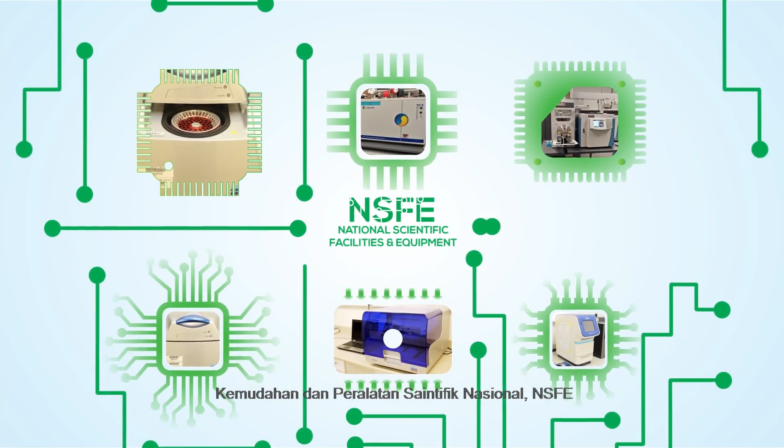National Scientific Facilities and Equipment, NSFE, aims to encourage the sharing of facilities and equipment and cultivate research collaboration among the STI community. You can also book NSFE via portal or mobile apps.

R&D Project Bank shows lists of information on research, development and commercialization projects throughout the Malaysia Plan, as well as its outputs and achievements. Technology Market, or TechMart, promotes local products or technologies and boosts technology transfer among researchers and industry.

STI Indicator is used to measure the performance of STI in Malaysia based on goals established by the government.

KRSTE.my empowers you to formulate STI policies based on STI data, streamline and optimize R&D resources, practice data-driven decision-making, and harness scientific knowledge for new invention and innovation.

Our new features will allow elastic search, automatic email notification, mass upload, live updates, dynamic report, and online booking.

Be a part of KRSTE.my to explore the explosion of scientific knowledge and information. CRIS, connecting you to the world of innovation.

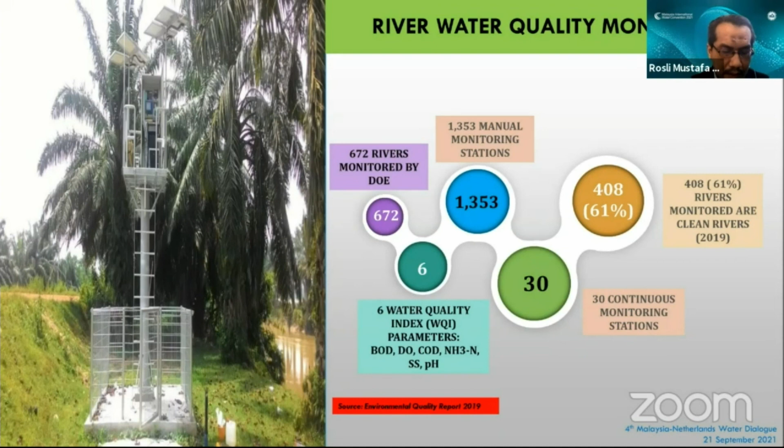For river water quality monitoring, we have 1,353 manual stations, as mentioned by our Datuk Sri Zaini Ujang, and 30 continuous stations across 672 rivers throughout Malaysia. Among the parameters monitored under the monitoring program are pH value, dissolved oxygen, suspended solids, biological oxygen demand, chemical oxygen demand, and ammoniacal nitrogen.

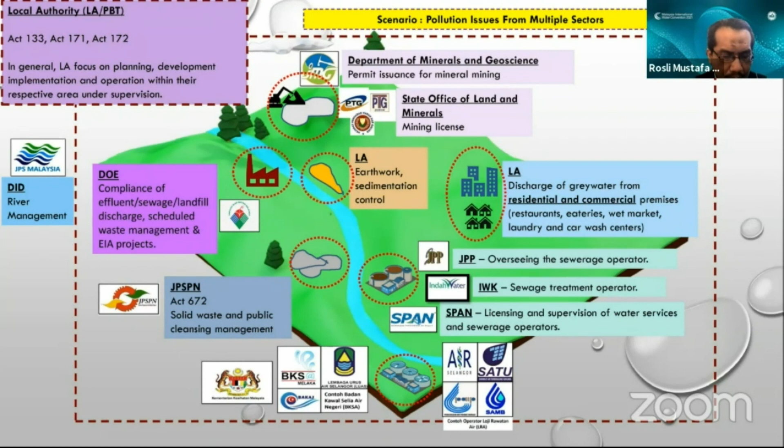Apart from the DOE, authorities such as Suruhanjaya Perkhidmatan Air Negara (National Water Services Commission), the Department of Environment, and the Department of Irrigation and Drainage, along with IWK, Indah Water Konsortium, as well as state water regulatory authorities and local authorities, also have an important role in managing this subject.

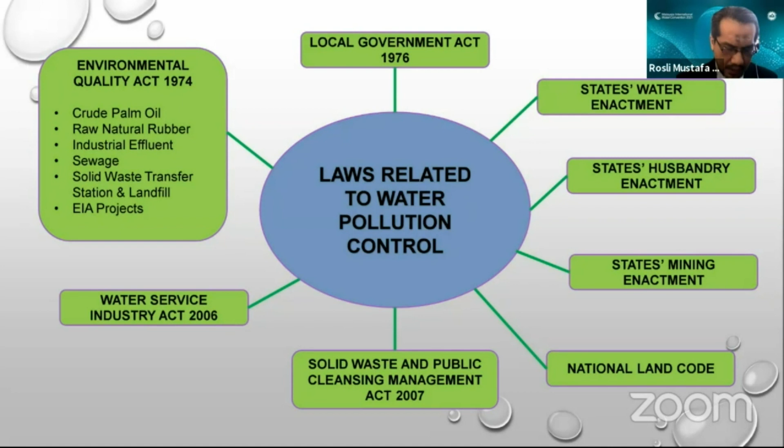Hence, a concerted, holistic and integrated approach involving related ministries, departments and authorities is of significant importance. The Department of Environment has incorporated the integrated approach element in managing water pollution for quite some time.

DOE also actively supports the plan developed by supplying river water quality data. And as mentioned by our Datuk Sri, public participation is very important, so we also carried out communication, education, and public awareness programs.

I have reached the end of my presentation. As a conclusion, an integrated approach among the authorities at federal, state, as well as local level is obviously a critical solution in ensuring water quality is well protected. In addition, public participation is also a vital component of this cooperation in safeguarding our water quality.

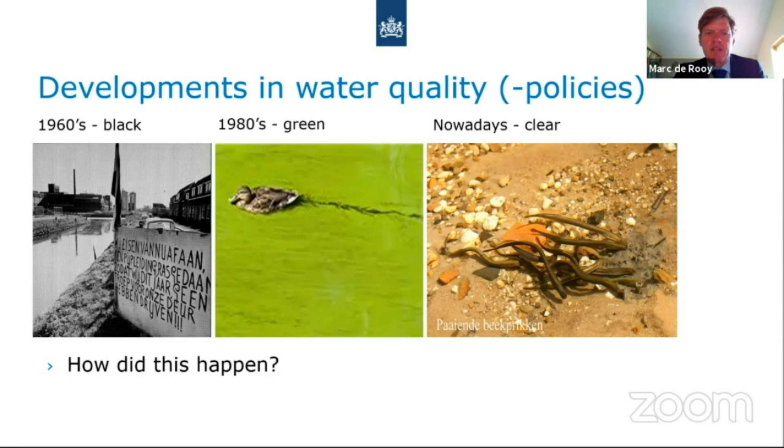So what happened in the Netherlands? We had a development in water quality since the 60s. In the 60s, our surface waters tended to be black because of the lack of oxygen. Over 20 years' time, we turned them from black to green because there were too many nutrients in them. Nowadays, not everywhere but in several places, we have clear water again, and we see species returning after decades of absence. So the question is, how did this happen?

Of course, something was done in the treatment technologies. In 1970, the Water Pollutions Act came into force, introducing a system of permits, taxation, and subsidies. In order to discharge, you needed a permit, and this discharge was taxed, and the money collected was used to subsidize new technologies and processes. This introduced a long-term process of continuous improvement. It took about 20 years, and in the starting years we really looked into the removal of oxygen demand.

In the 90s, there was the EU directive from the European Commission on the treatment of urban wastewater, which meant we also had to remove the nutrients. This made the change from green water to clear water.

Now, in the current days, you can see a lot being done in process optimization. We work on the removal of micropollutants, which is the latest development, and we are recovering energy and raw materials.

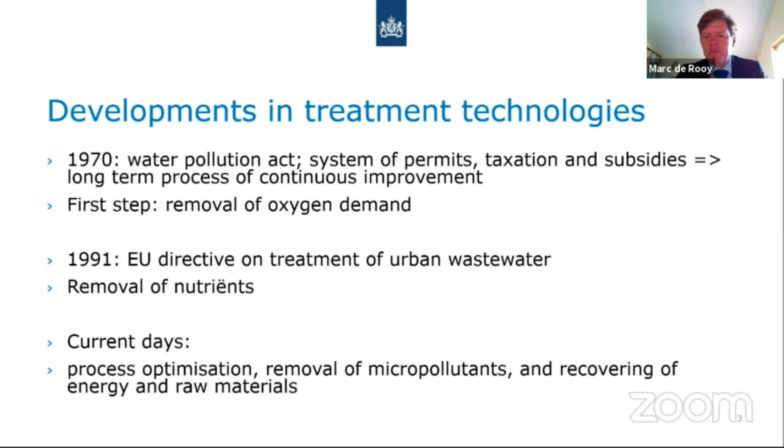However, in 2012, the Nereda process was invented, which you could say is an optimization of the activated sludge process. It's a cycle in 3 phases. First, you feed the tank - you can see it's grains, and the bacteria live in these grains. In the first phase, it's being fed, then we have the aeration phase, then there's settlement, and then part of it is discharged, followed by new feeding, and it all goes around.

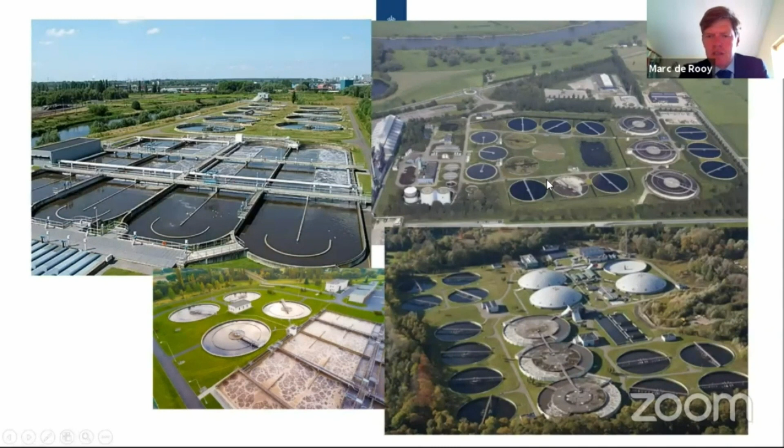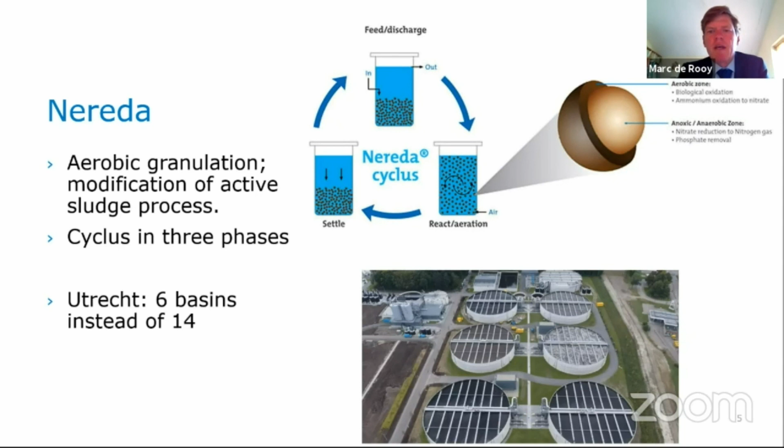Well, it really made the installations a lot smaller. So for example, in Utrecht we used to have an installation with 14 of these settling tanks, and nowadays it's all comprised into 6 tanks. So it makes the installation much smaller and also more energy friendly.

Another improvement that started last year was the removal of micropollutants. It started in 2016 with the Dutch chain approach on pharmaceutical residues. And of course there's being done a lot at the front end of the whole chain, but we think that most will be done at the sewage treatment end of the chain. We think 80% of the effects will be achieved there.

So we have to improve the sewage treatment plants, and at this moment we are looking at the use of ozone to oxidize micropollutants, and active coal to adsorb micropollutants. There is an innovation program started with the water boards, the regional authorities that own the sewage treatment plants, together with consultants and universities, really looking into new techniques and improving the existing ozone and active coal technologies. This year, in 2 weeks, the first full-scale installation...

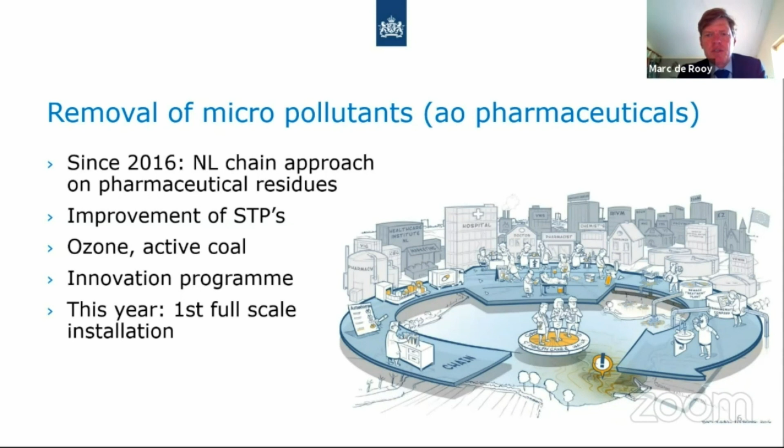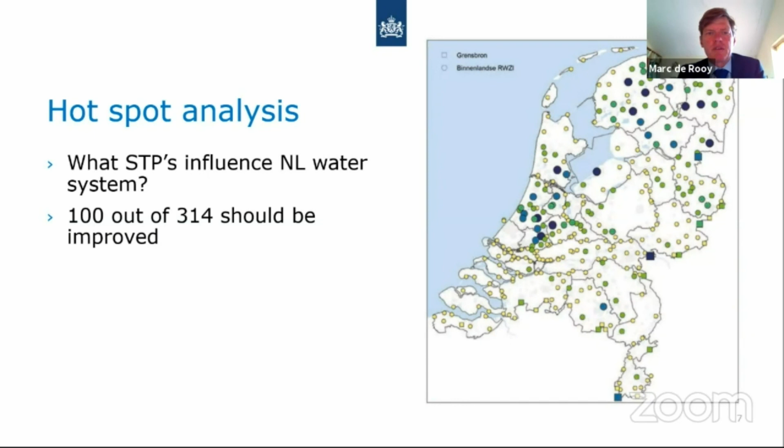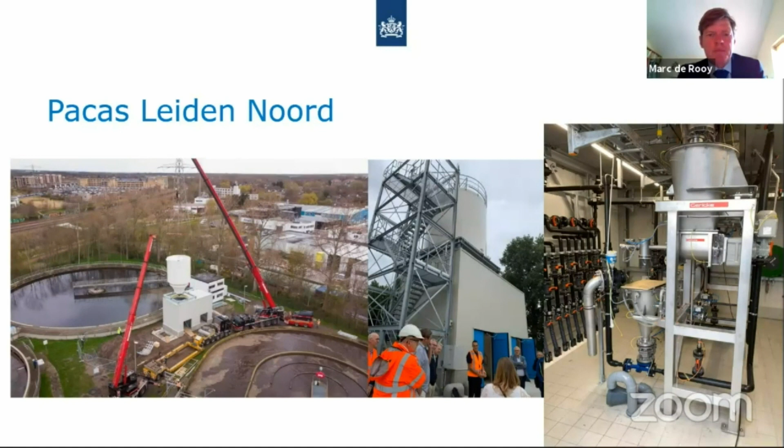...will improve all of our wastewater treatment plants. We made a hotspot analysis, which showed that there are about 80 to 100 STPs that are really influencing the surface water, and they need to be improved first. This is the installation in Leiden North. It's a coal installation that will be opened on the 30th of September. You can see here the active coal tank, where you can see how small the installation is, and here is the actual dosing part. It's really small, and I think it's a really good next step in our treatment of urban wastewater.

Finally, we have some other developments. Of course, recovering energy in the form of gas was longer known, but nowadays we are also looking at recovering raw materials and nutrients, done in the form of struvite, but also cellulose. The latest improvement is that we are actually recovering the water itself. We have problems with droughts also in the Netherlands, and we're looking now at the possibility of reusing that water in agriculture, but also in industrial processes.

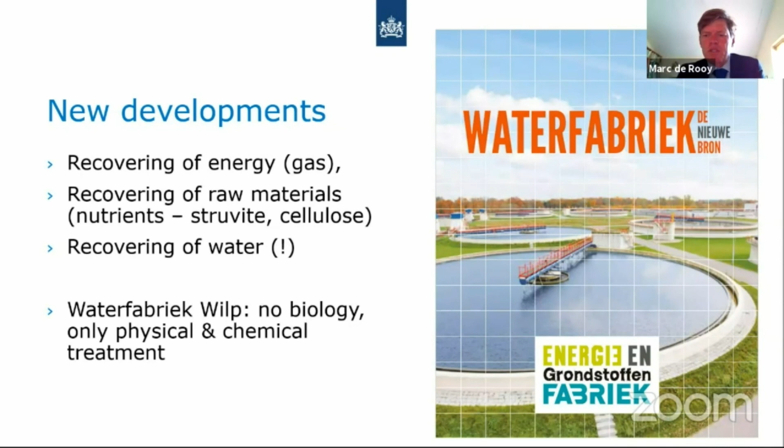And finally, very interesting but still very expensive and rather new, is the Waterfabriek Wilp, a water factory in Wilp. Wilp is a small place in Veluwe, in the Netherlands. That doesn't use biology at all, it's only physical and chemical treatment. You could say that it's refining the wastewater, trying to recover as much energy and raw materials as we can from the water.

So this was my presentation. Feel free to contact me if you have any questions. Thank you.

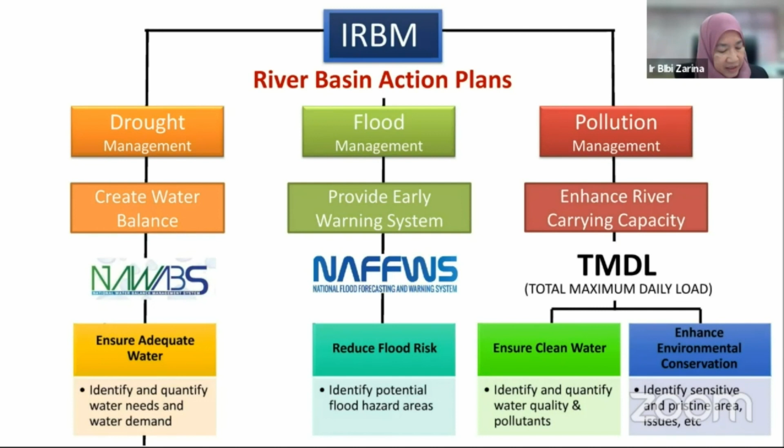So what is important is for us to look at the carrying capacity of the river, which can be done by looking at TMDL, or Total Maximum Daily Load. TMDL is the maximum amount of pollutant that a body of water can receive or accept. This is under the Department of Environment, DOE, where the aim is to ensure clean water, clean river, at least class 2, where we can have body contact.

Besides the integrated approach mentioned, another approach is through cultural transformation in river management. The minister and Secretary General also mentioned this, which we call Denai Sungai Kebangsaan, or the river trails. This program is strongly promoted by the Ministry of Environment and Water, or KASA, where the objectives are to control river pollution, encourage recreational and nature-based activities, improve water quality, and establish shared responsibility to preserve our river and encourage ecotourism.

The strategic partners will be the federal government, state government, local government, NGOs, communities, and also private corporate entities or universities. As mentioned earlier, you can also have Friends of Rivers, the NGOs, and we work together with them under this program.

The program can include an adopt-a-river program, CSR program, awareness and education program, community program, and we can have gotong-royongs. Gotong-royong is our term for when we go together and clean the river.

As a way forward, among the strategies that the DID, the Drainage and Irrigation Department where I come from, is working on is to build with nature. Meaning not to concrete line all the rivers, which is what we used to do, but now we're going back to building with nature and making room for water. We know that water needs space, it needs room.

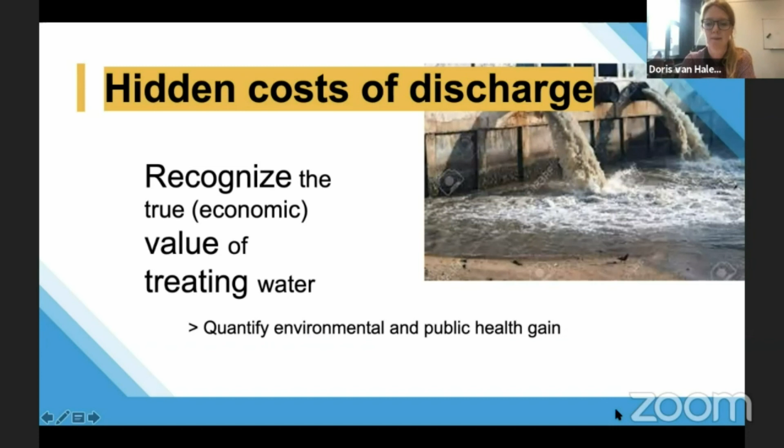So I think it's important that we start recognizing the true economic, not only economic, but true value of treating water prior to discharge. Not just looking at the health of our rivers, but also looking at what is in our waters and how we can add value to this waste stream. Which means we also need to quantify the environmental and public health gain associated with having better quality discharge water. I'll get back to that later.

So first, let me introduce one of our projects in New Delhi, India, which attracted a lot of attention in past years. Here you can see our king and queen visiting the rather polluted site, because this project is about reusing water and reusing nutrients and other valuables that could be available in the water of the Barapula drain, which used to be a storm drain but over the years has turned into an open sewer, because there is no closed sewer collection in this part of New Delhi. Which means it's more of a river that is highly polluted, smelly, and unattractive and unhealthy to live close to.

So within this project, which is a collaboration between IIT Delhi and TU Delft, Wageningen University, and NEO - so different research institutions within the Netherlands - different technologies are being studied to recover resources in the water. On the right, you can see a project on algae. In the middle, there is a wetland project. And to the left, there's a project by my colleague Antonella on the DAF system.

My own background is not in resource recovery from wastewater. I'm a drinking water engineer. So I don't really look at the resources in the water, but I'd rather consider water to be the resource in the water. I'm quoting a colleague from Water Board here in the Netherlands who said to me, water is our most valuable resource. For us, it's really hard to give value to our water because of restrictions and other reasons that make it complicated to offer fully treated wastewater back to the community. So much of the water that is being treated rather well now is discharged into the ocean, instead of reuse for agriculture or construction or even households.

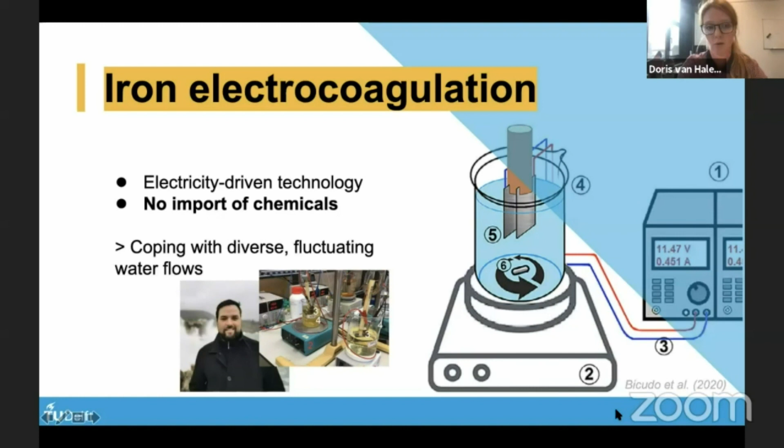So I think this is really exciting. It needs scientific depth, but in practice you have a bulk technology that can do a lot of jobs at the same time in a water treatment train.

A second project I'd like to highlight is a project of my colleague Saker, here in the picture. This project is oriented on Malaysia - it's a palm oil mill effluent to diamond project. I think this project nicely illustrates that instead of looking at the waste, which is the palm oil mill effluent, they are envisioning the production of diamond electrodes, which is really attractive, right? So in this case, prevention - preventing pollution - I think can be turned into something that is actually quite sexy, namely producing diamond electrodes. Technologically advanced, but in the end this palm oil mill effluent treatment will prevent pollution of the rivers.

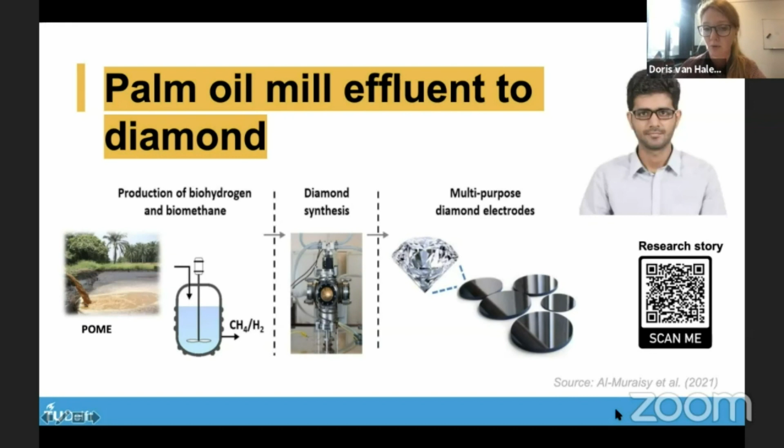My last example is a project we ran last year, close to my own work field, related to groundwater sludge. There's actually a wrong number here because there is every day 10,000 tons of sludge produced in the Netherlands. So here it says worldwide, but it's just in the Netherlands. We rely on groundwater but are a small country, so if you translate it to the globe, it's way more tons of sludge produced by the production of groundwater.

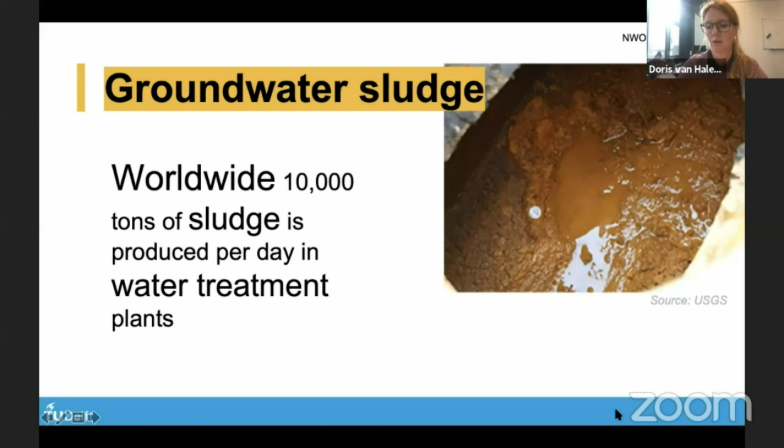The sludge now, at least in the Netherlands, is mostly due to the filtration technologies we use with oxidation filtration, typically used anywhere in the world. But we envision a shift to more anaerobic reverse osmosis, where the concentrate stream might be even higher than the sludge currently produced. So this really is a waste problem.

What we looked at is, instead of producing this waste, this watery and not really useful iron oxide sludge, could we produce vivianite, a beautiful blue magnetic crystal. And it worked, we were so happy. The nice thing is that apart from producing vivianite, as you can see in this graph, we also got higher removal percentages of the iron, which you can see if you compare the second bar to the first one - it's slightly higher.

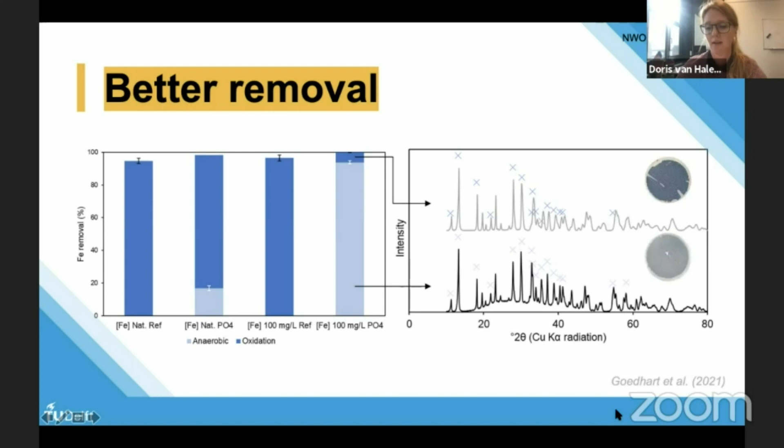At first glance I feel like, what does it matter, it's just a few micrograms per liter extra removal. But actually for water companies this is incredibly important because iron, even at low concentrations, causes brown water at the customer. Here in the Netherlands we drink water from the tap, and having brown water once in a while is really problematic for trust in water quality. So a very exciting new innovation, and we'll be working on it further in the coming years.

So what I wanted to underline in my presentation is that water pollution goes beyond cleaning up our water bodies - we should start rethinking and valuing our wastewater streams, and technologies can help in that.

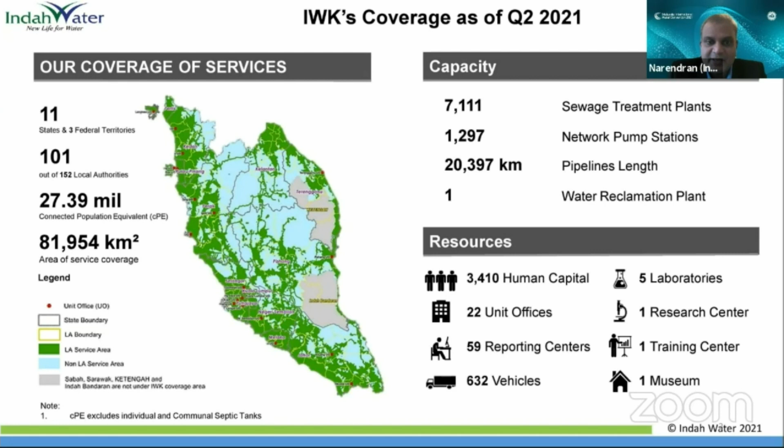Our resources include about 3,400 human capital - staff and employees - supporting through 22 unit offices nationwide. At scattered areas we have reporting centers, 5 laboratories, 1 research center, 1 training center, and 1 museum - an old British-built pump station that we are rehabilitating now, soon to launch as a museum sometime next month.

At a glance, in Malaysia, sewage management, apart from connected sewage services, we have close to 1.3 million individual septic tanks and close to 900,000 pour flush systems. So apart from treating at our public sewage treatment plants, we also provide desludging services to all our customers nationwide.

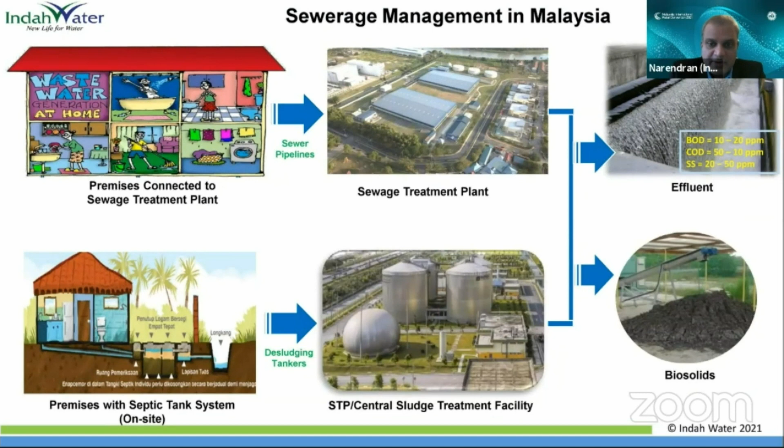Very similar to what Engineer BB presented just now, there are many sources of pollutant into rivers, among which animal farm, manufacturing industries, agro-based industries, wet market, and sewage. Now, the major pollution does come from sewage, of which primarily from septic tanks.

So what we have done this year is we have gotten, or rather the government has approved, for desludging of septic tanks to be done on a scheduled basis, and the regulation has been gazetted.

From the company perspective, we have enhanced throughout the years the initiative to ensure that water catchment areas are protected. Hence, our treatment plants located upstream of water intake points and major plants are equipped with early warning systems. We have 24-hour surveillance team members moving around at critical plants upstream of water intake points, and 24-hour employees or contractors manning large plants, primarily centralized plants and plants within water catchment areas.

Our employees, 2 years ago, designed a manhole locking system where apart from the manhole cover, we have another platform beneath it with padlocks, which is very difficult to open. So we have initiated the installation of such manhole locks at critical areas. This is because we have been facing illegal dumping by irresponsible parties into secluded manholes located at secluded areas.

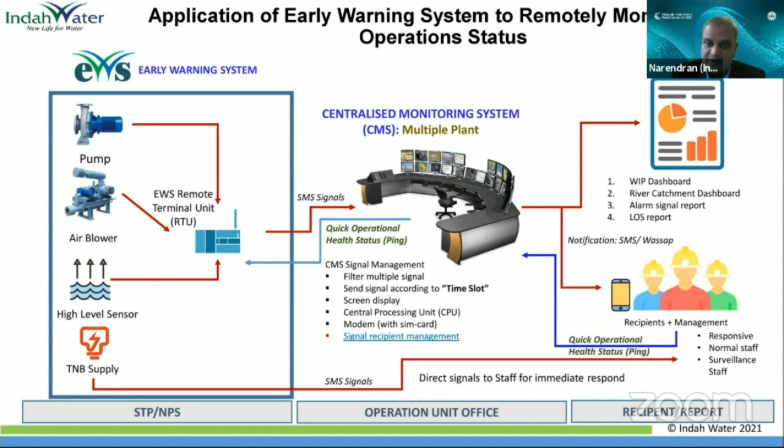So all these signals are sent through SMS, and once the team is aware, necessary action will be taken. We monitor this and have created our own dashboard for internal use. This has been progressing, and we've been continuously enhancing our system.

This is a typical example: mobilization of a 24-hour surveillance team at critical water catchment areas. We have a team with 3 shifts, at times 2 shifts, moving around to ensure that all our plants are properly running and there's no illegal substance entering into our plant.

This is a new initiative that we have carried out; the proof of concept is ongoing now. We have installed a device to detect potential illegal substances such as hydrocarbon, solvent, pigment, as well as COD. So if there's a spike in COD, this sensor can trigger and we can take the necessary action to carry out what is required. This has been quite successful. It's very costly, but we're looking at it for installation at critical areas.

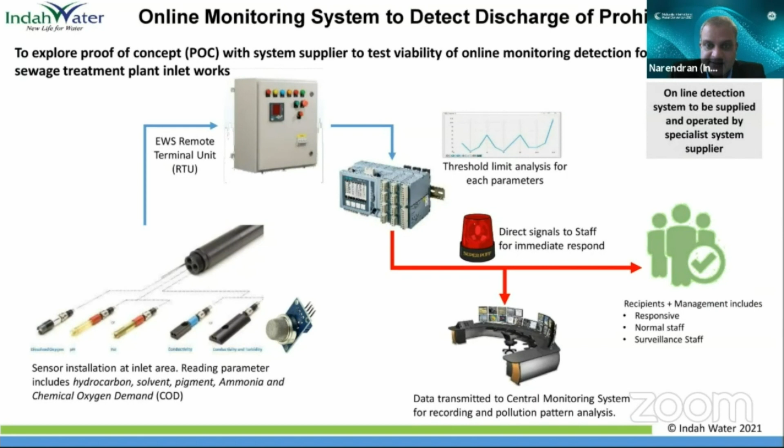Moving towards achieving a circular economy as well as controlling pollution, we have been working with the Ministry, which has been very supportive in creating or converting the planned sewage treatment plants, future sewage treatment plants, to also be complete holistic water recycling plants for non-potable use.

So we have a target, the ministry, within 10 years until 2030, we have to have infrastructure to produce 1,500 million liters per day. This is an initiative to create a new source of water, but I want to emphasize it's purely for non-potable use, mainly for industrial usage. By having such advanced treatment technologies, we are able to control pollution and further recycle this water for good use.

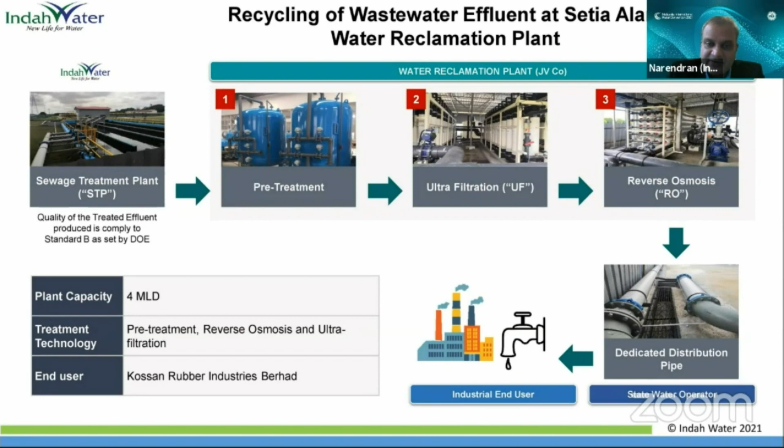Thank you so much, Mr. Narendran. I think a lot has been shared by Indah Water Consortium Sdn Bhd, and a lot has been done as well, and a lot will be done towards protecting our sewage treatment plants, task forces on states with higher risk, and providing online monitoring systems for all the systems in place by Indah Water Consortium. Thank you, Mr. Naren.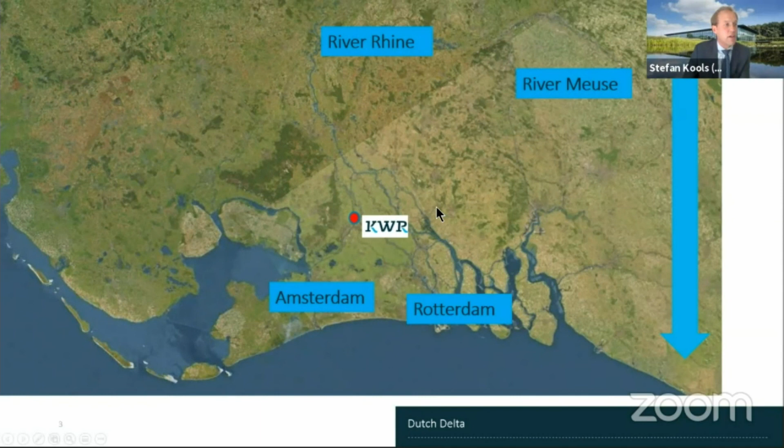I'm talking about surface water today, being the focus of our studies. For example, this is a recent study in which we were able to look at the long-term development of all kinds of compounds that have been part of the national monitoring program, to inform the drinking water companies, the water stakeholders, and also the Dutch government. You can clearly see that some compounds are phased out, they are banned, and then they will diminish in the water. But also some new compounds will emerge and be detected, and sometimes even increase due to high use and high loads in the river.

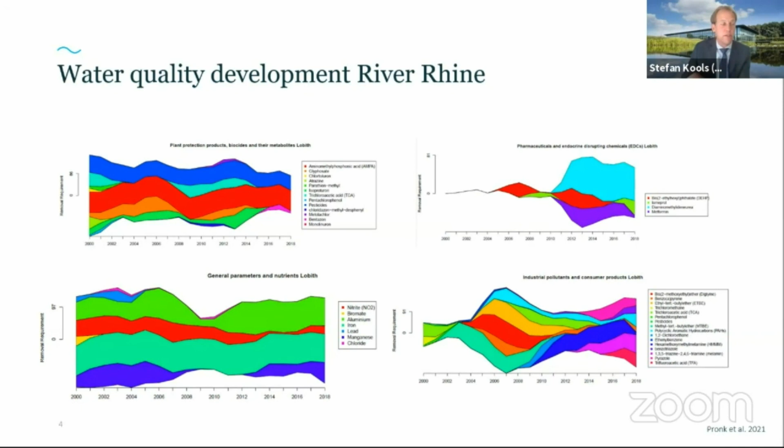For example, we were able to make a water quality index to show that slowly the removal requirements, so the amount of technological equipment needed to produce drinking water from river water, is slowly increasing over the years, which is not what we want to have in Europe and in the Netherlands. We want to have cleaner water.

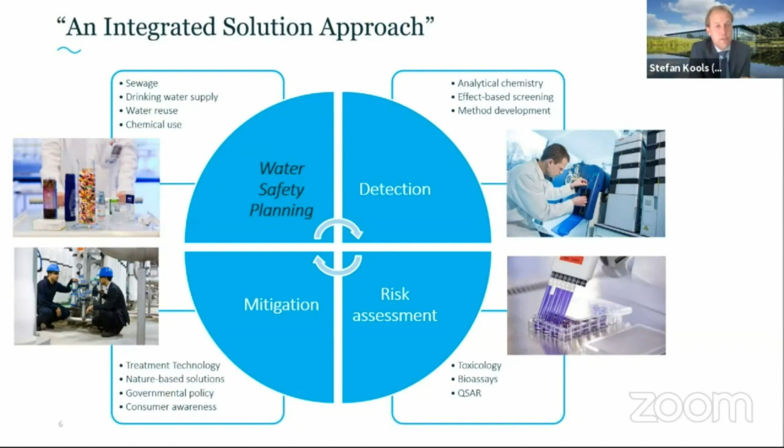So the title of today's session was an integrated solution approach, and I have been focusing on the water safety planning cycle as a whole. Our research is focusing on detection methods, on risk assessment, and mitigation options, the last of which is technology. But let me first start with detection, the core of our research group.

Here we often use the term target analysis, where you already know what you are looking for, and you specifically measure or detect the compounds of interest. But what we have also been successful in the last decades is to more and more study the unknowns, the non-targets, the compounds that you don't have information on. And with that, you use high-resolution mass spectrometry.

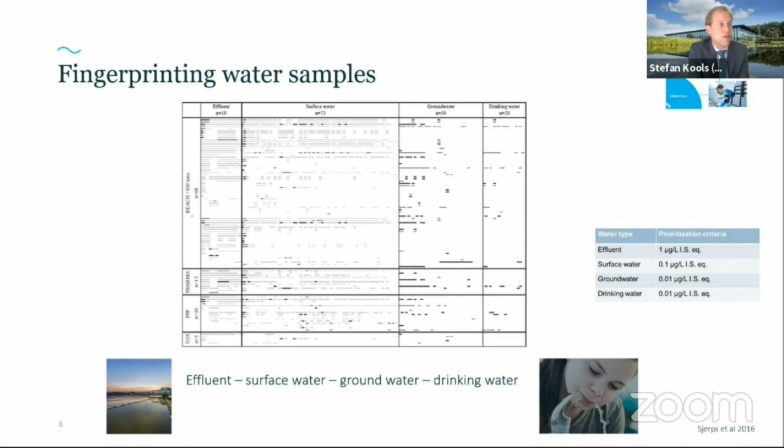It's sophisticated lab technology, but you can be very successful in making fingerprints of water. For example, this is a fingerprint where you can see that all kinds of suspects are measured in effluent, surface water, groundwater, and drinking water. If you look from left to right, you can see there are fewer features visible in drinking water than in effluent. That's a good sign that removal and transformation take place and the compounds are disappearing. You have safe drinking water.

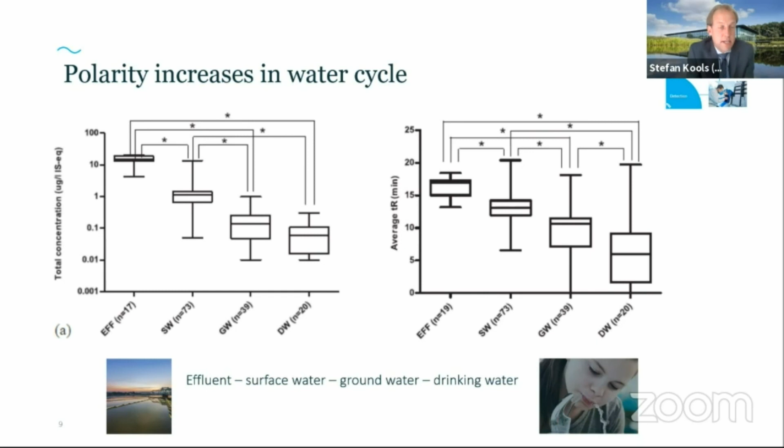What you also see is that if you go along this chain of water, the water cycle, the polarity increases, which means compounds tend to dissolve better and behave better in water than not in water. So they are more difficult to remove using traditional techniques, and you need advanced techniques, which have also been presented by the Ministry of the Netherlands.

If you have detected these compounds, you want to know the specific characteristics of those compounds. You want to identify them, know what kind of substance is in the water, and do risk assessment. You need some background, maybe bioassay information using cells that respond to the chemicals, so you can find toxic effects.

Eventually you can inform, for example, the government or the sewage treatment plant owner to monitor a certain compound. We use all kinds of published techniques, but it comes down to making clusters and prioritizing based on chemical data and toxicity data. For example, there is a quantitative chemical risk assessment procedure where you can identify the exposure, how much is actually in your drinking water, what the hazard is, and how to characterize the risk. If the risk is too high, what can you do to optimize your system?

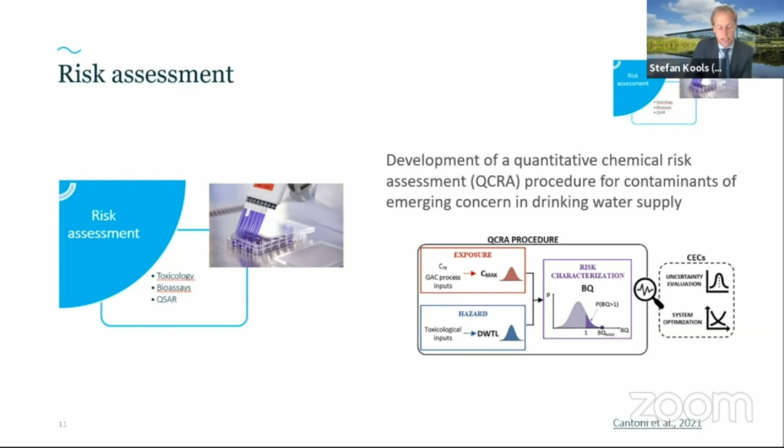So it immediately links to the next phase: what can you do on mitigation? As presented in previous talks, there's a lot of technology available, but you also want to know whether it works, so you need some techniques. For example, we have been successful in screening for unknowns and knowns to assess treatment performance, such as this study on several oxidative and non-oxidative techniques in the Netherlands.

Mitigation can also focus on nature-based solutions, like the constructed wetlands you've seen. You can use this information to inform governmental policy, which has been clearly presented already—that you'd rather not have to cure the patient, but prevent the patient from getting ill, meaning you want to have a clean river at first. What is not in the river doesn't have to be cleaned.

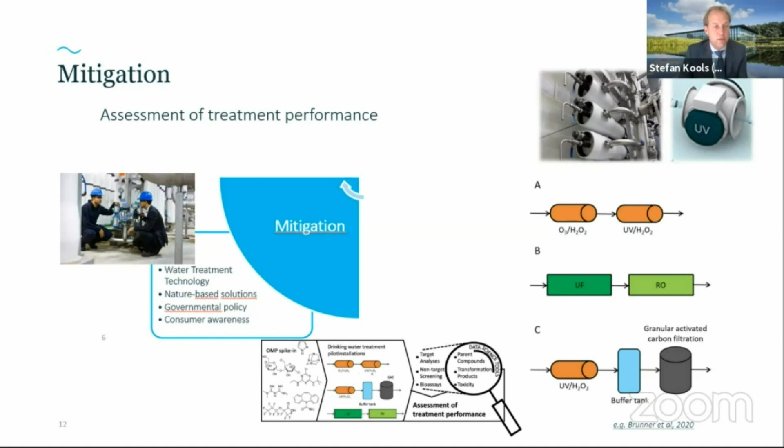So consumer awareness about the risks, using our sophisticated techniques and toxicity information, can be used to inform consumers and governments. For example, this has led to the chain approach in which the whole production, use phase, and waste phase of using pharmaceuticals in the Netherlands has been assessed, and everybody in this chain is doing something, not only focusing on end-of-pipe treatment.

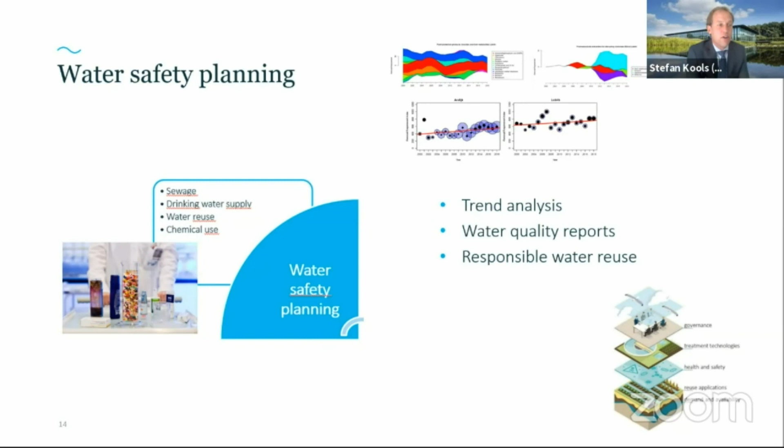So if you want to close the water solution, the water safety planning, you can use all this data to do trend analysis to inform your water quality reports, which hopefully leads to responsible water reuse.

What we have studied, for example, is this shift of paradigm: not only safe treatment and discharge of wastewater, but also transforming used water into fit-for-purpose water. Then you need an interdisciplinary approach combining governance, treatment technologies, health and safety issues, and all kinds of reuse applications.

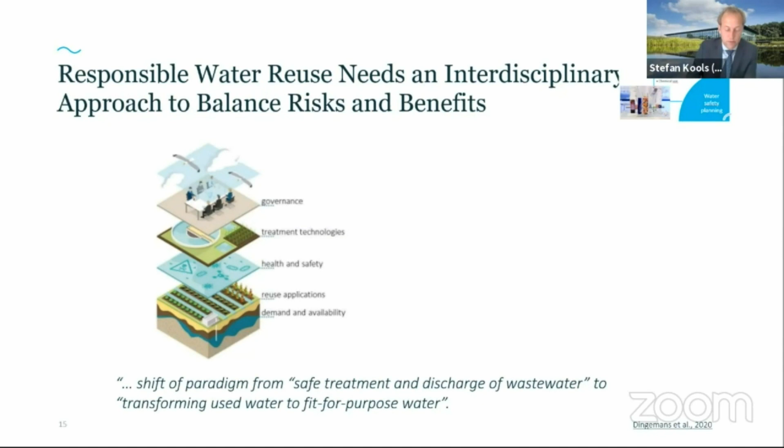Because in the end, it's all down to demand and availability—too much, too little, or too dirty. But I'd rather have the right water with the right quality at the right time. That's the goal of the research this can lead to. So with that, I hope I've given an overview of our work, and I'm happy to take some questions.